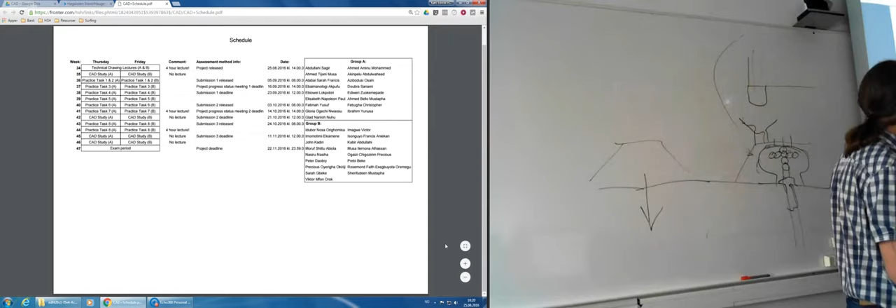So the submissions will be purely Inventor submissions, and you will do them individually. You will get an assignment, get a part that you are going to model, create a 3D model of, and then make a 2-dimensional drawing of it, and that's what you're going to submit.

The whole point is that if you make a lot of mistakes in the first one, that's not a big problem - it's not going to pull your grade straight down. But what's going to pull your grade down is if you make the same mistakes in the second one and the same mistakes in the third one.

If you keep making the same mistakes - because between these I am going to comment on them, so you'll get feedback on what mistakes you've made - and if you don't check your comments and avoid making the same mistakes, that's going to have a negative impact on your grade. But as long as I can see you've progressed, learned a lot of stuff, and made some new mistakes later on, that's not a problem.

Everyone makes mistakes, especially in something like this where we have such little time to learn it. Professional CAD drawers go to school for 2 years, and then have 2 years as an apprentice if that's their vocation, while we engineers are supposed to learn it in a couple of weeks during fall. So it's quite a difference.

So no one is expecting you to create perfect drawings. If you manage to create perfect drawings, hey, that's perfect, nothing better. But there will be mistakes, and that's not a problem. So if there are a lot of comments on your first submission, don't be afraid - it's not going to be a huge problem. Just learn from them and correct them for the next submissions.

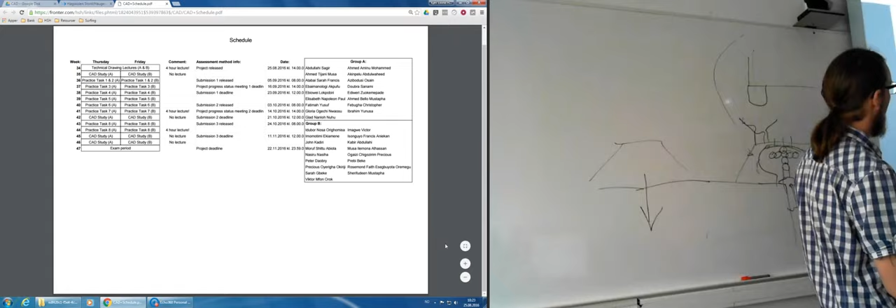Since you already have CAD study next week, I can hold off lecturing you on practice tasks 1 and 2 for two weeks, but you're very welcome to start already. As you'll see as we progress through the compendium today and tomorrow, I've made a fairly step-by-step guide for all the practice tasks, so it should be quite possible for you to start working on your own.

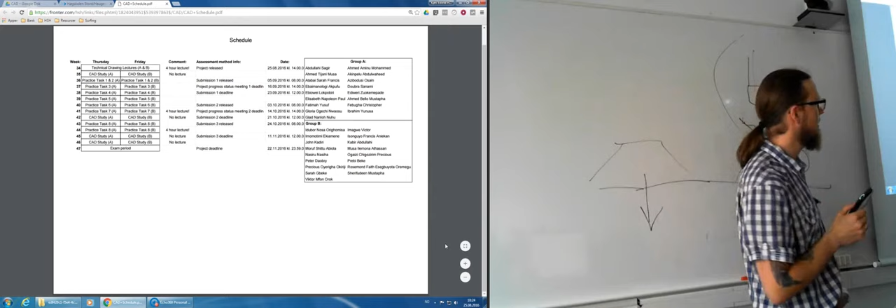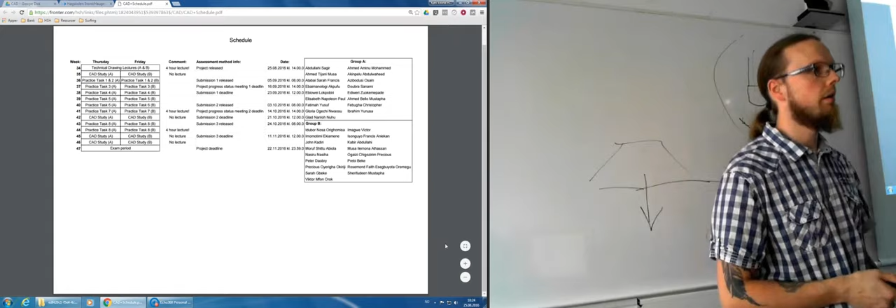You're supposed to have 4 student assistants, but Gabriella is going away for a week or two - I think it's next Wednesday - so you'll only have 3 student assistants. Still, you'll have 3 available to help if you're completely stuck on something.

As I said, this is up on Fronter. You go to the CAD folder and you'll find the CAD schedule. I think Einald has put a scheduler in there too with CAD times, but just disregard that one. He's basically just put in the times for when CAD starts. Follow the CAD schedule in the CAD folder instead, because that tells you what you're going to do and what we're going to work on.

We also have the compendium, which we're delivering out now, also available as a PDF. There are a lot of links inside it to YouTube videos, so you can either search for the name of the video or open the PDF and just click the link. All of the YouTube videos are on my own personal channel, so they're easy to find anyway.

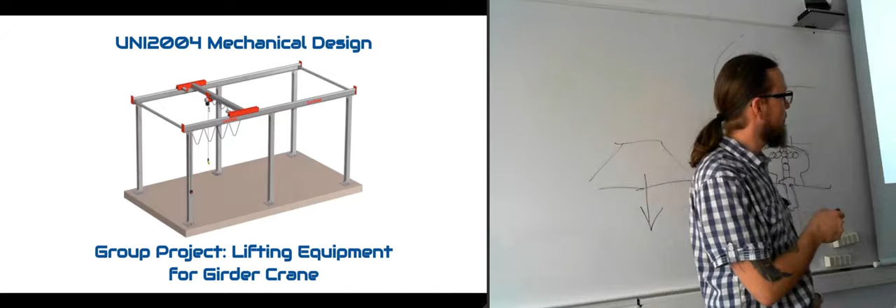So it's a group project or a team project, whatever you want to call it. You're going to design a lifting equipment, which is to be used with a girder crane. This is an illustration of a girder crane. It has a trolley up here, which can move this way, and it also can move this entire girder that way, so it has X and Y coordinates, so it can move in two directions. It has a hook at the tip, and you can lower the wire down and lift stuff with it. So if you've ever been inside industrial warehouses and stuff, they use this all the time.

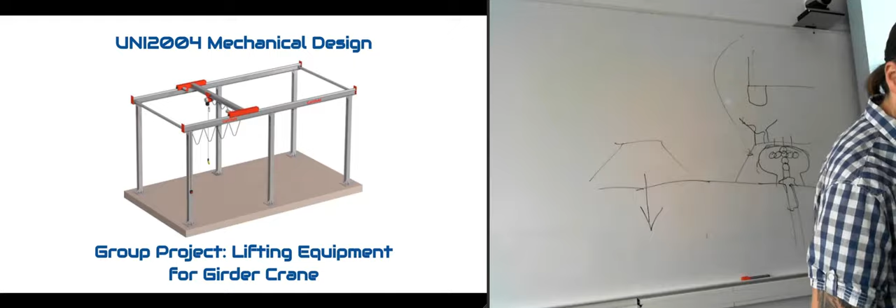So the project description: we have a customer who is in need of bespoke lifting equipment. Bespoke means that it's custom made for their need, a synonym would be tailor-made. So it's something that you are designing for the customer for their exact purpose, and they are going to use it with their girder crane.

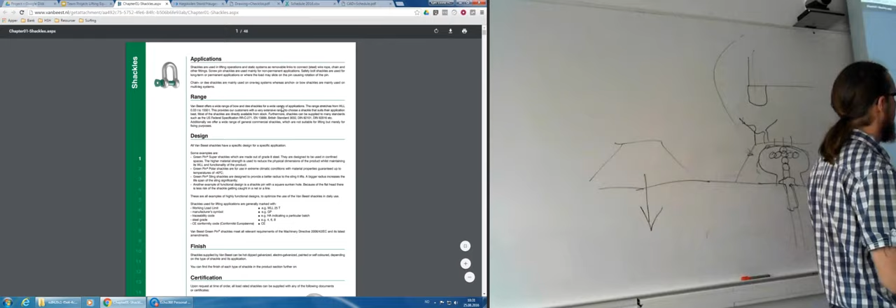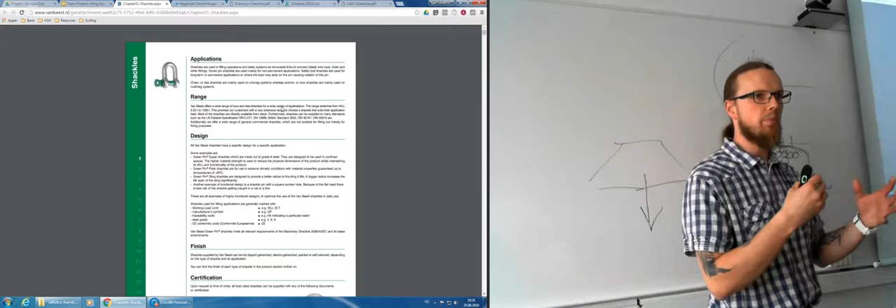They are going to attach the lifting equipment to the girder crane hook by using a green pin standard shackle. So you can see there's a link there, which puts you into a PDF document, and this is the kind of shackle that's going to be used. So basically the hook is going to hook into the top part of the shackle, while this green pin is going to go into your lifting equipment. So you have to have some interface in your lifting equipment that allows you to fasten this shackle onto it.

So then you have to just go into the tables in that PDF for the green pin shackles, and you will find workload limit 1 ton, and there you will have all of the dimensions given, so that you will know how your design has to look with regards to the shackle.

This means that the lifting equipment will also have a workload limit of 1 metric ton. We could have told it to be something more, but then we would have made the shackle the weak point in the system. So you would still only be allowed to lift 1 ton with the shackle in place there.

But usually, when you're designing stuff that's going to use shackles, you always try to design it to the specific shackle. So if the shackle has a workload limit of 1 ton, as in here, you will also design for a workload limit of 1 ton in your design.

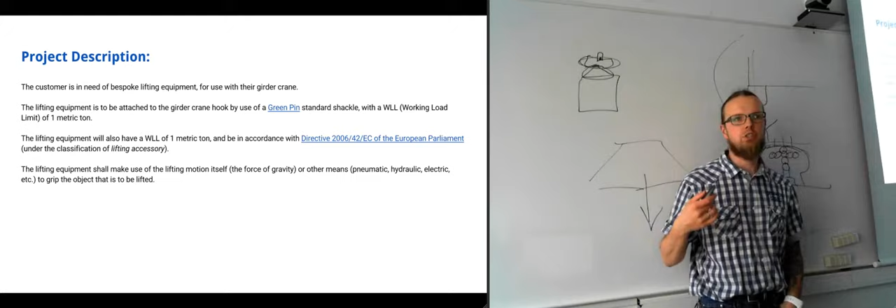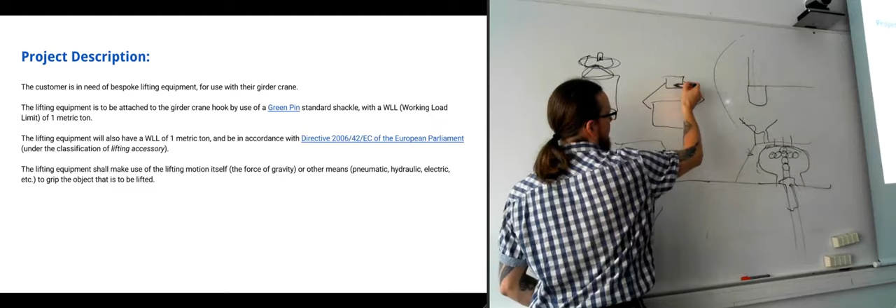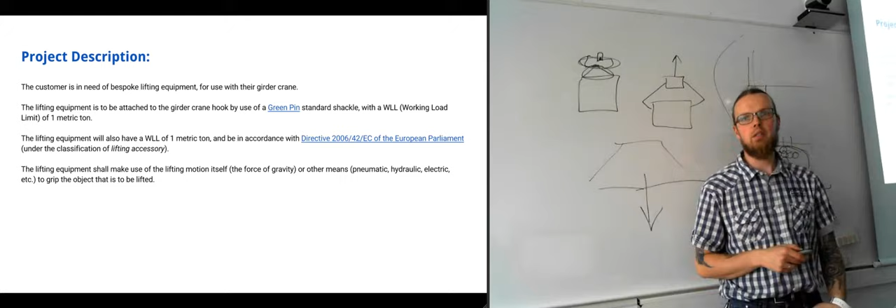But if you can, I would advise you to try to challenge yourself to find ways of using gravity to do this, to make the mechanism. If we have this one again, if there is some way you can have some claws or something that will grip it on both sides, and then through some mechanism in here, it will be as soon as you start lifting it, these claws will press in and hold it tight. So that's other ways of doing it. Those can be quite fun to look at, because you get to look at levers and everything and how you're going to design it. It can be a bit more challenging using the force of gravity, but it is also more satisfying when you see how you can do it.

So we have several teams, and each team will be assigned a different object, as I said. This also means that each team has to find their own solution, because none of the objects are alike, so it won't be possible to sort of borrow ideas directly from others. Well, maybe you can borrow and adapt ideas from other teams, but you can't borrow them directly. That's pretty impossible.

I've already assigned the teams, 3 or 4 members for each team. The reason I've already assigned them is to simulate a work situation, because unless you have quite a lot of experience and are in a position where you are a project leader, you are not able to choose who your team members are. If you're a project leader, you can usually say, well, I need that guy and him on my team, then we can do this job. But usually, as a freshly educated engineer, you are the lowest ranking member of the team, so you can't get to choose anything. That's why I've just put everyone into groups, so that you sort of just have to find a way of working together if you're not used to working together.

And the team members, you get them here. As I said before, I'm not going to try to pronounce much here.

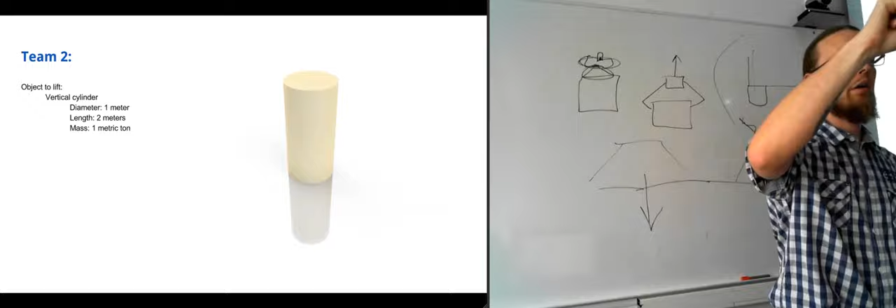You have team 2, they are going to do a vertical cylinder, which means that the cylinder is going to be placed vertically on the ground, so you're going to have to be able to lift this in some way or other. Let's see here, team 2. And here we have the team members of team 2.

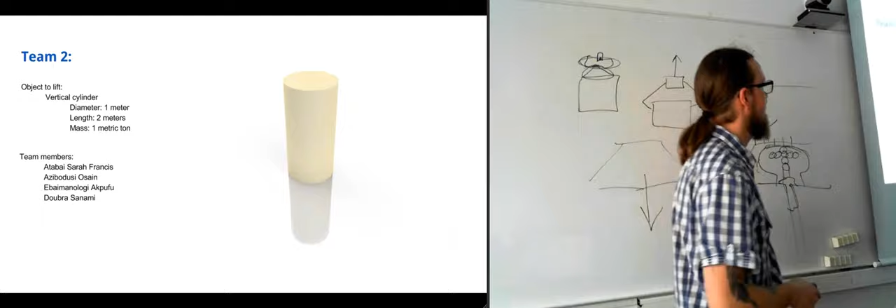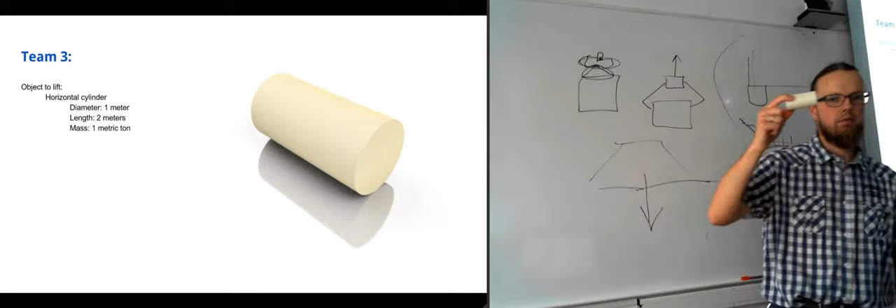Team 3 will have also a cylinder, but now it will be horizontal instead. So that's a different way of lifting it. This one. And this is team 3.

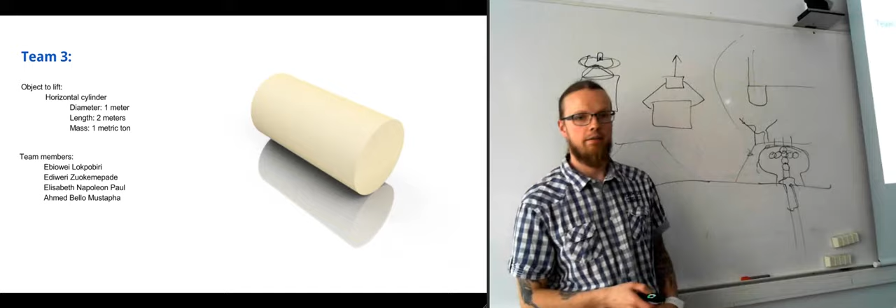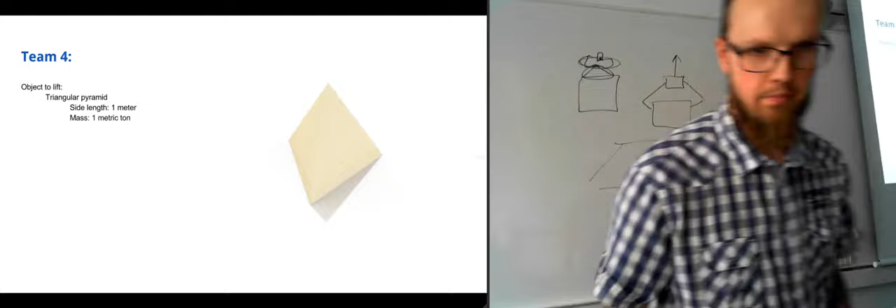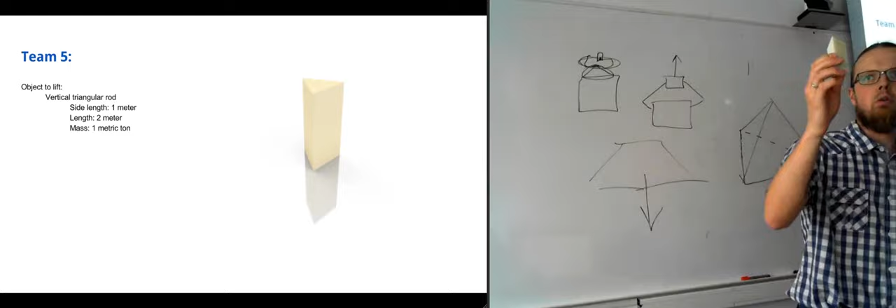Team 5 will have a triangular rod, so it has 3 sides, but it's going to be vertical instead. The team members.

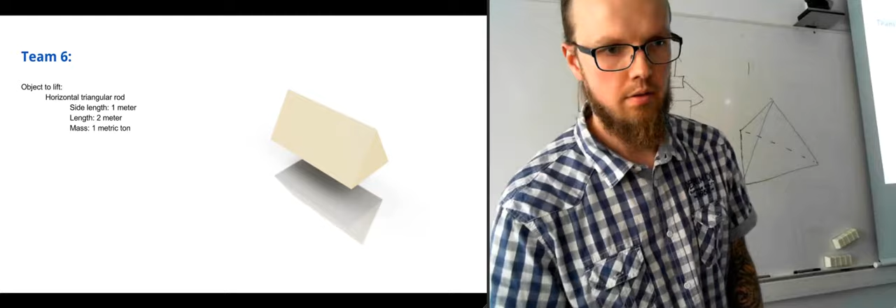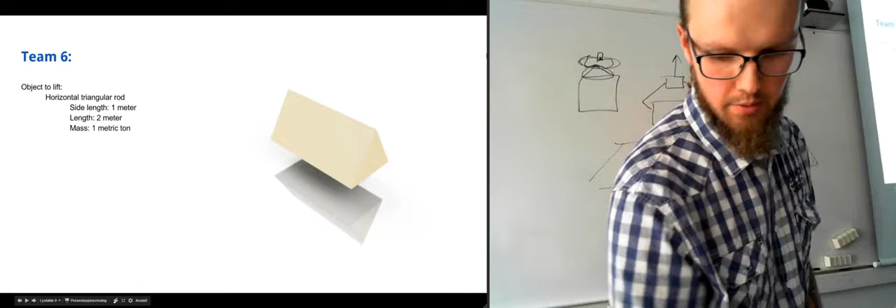We have a horizontal triangular rod for Team 6, so it's basically the same as Team 5, on the horizontal instead of vertical. And the team members are here.

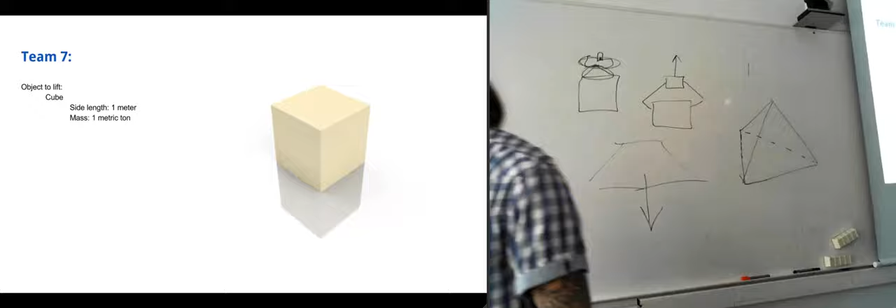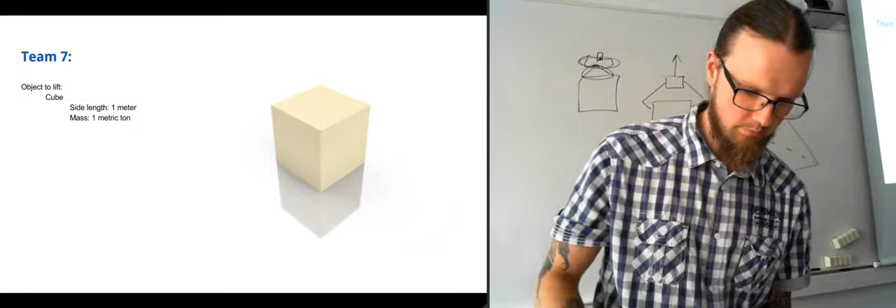Team 7, they have a cube. So a cube will be fairly similar to what I drew on the whiteboard. And the team members.

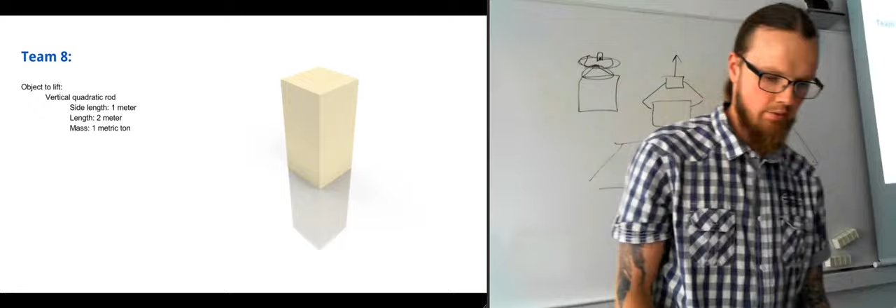Team 8 will have a vertical quadratic rod. So it's this one, vertical. And the team members are...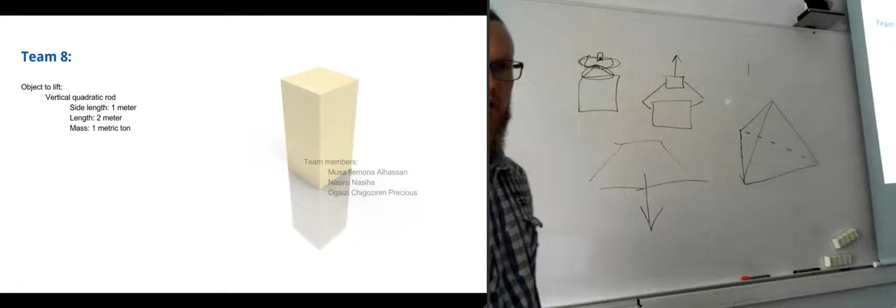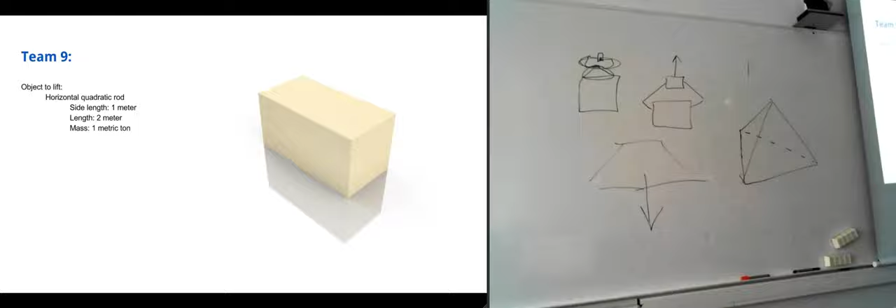Team 9 will have a horizontal quadratic rod. And the team members are...

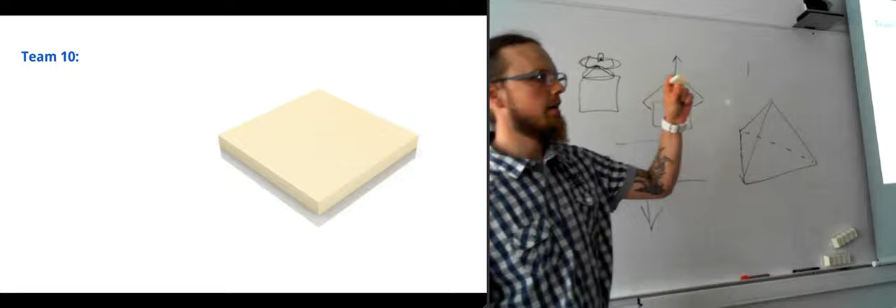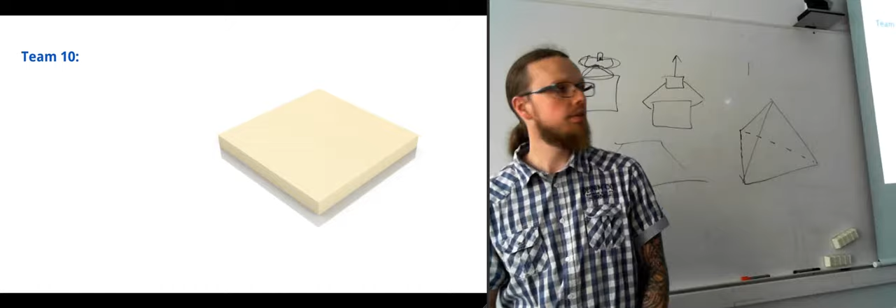Team 10 will have a flat plate, so it'll be lying horizontally, the entire plate. The problem there will basically be to get a grip on the sides or something if you're going to try to lift it somehow. And the team members.

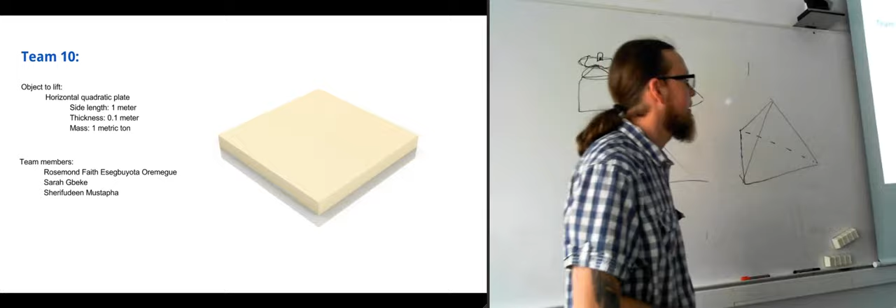Mostly this has been done alphabetically. I've just picked people into teams, so there's not much forethought that I put into who I've put into which team. It's basically done from the attendance list for Group A and Group B, and I just pick people. So it's fairly random, everything.

During the semester, we will have some progress status meetings. Those status meetings will be done with the team representatives, so all of the team members, and representatives of the customers, which will be either me or Torbjørn. So for the first, I think I'll get that later on. We have two mandatory meetings, so there are 2 meetings which you have to have with us.

And then we can schedule extra emergency meetings if needed, so that if you've had the 2 meetings and ended up with a design that you're going to continue going with, you've chosen your solution, and then you suddenly figure out that this isn't going to work at all, we need to do something completely different instead. Then you are allowed to schedule an emergency meeting with one of us, so that you can get a little bit of feedback on what other solution you should choose.

Me and Torbjørn have some experience in this, so we should be able to direct you into a workable solution first off. So I think it will be enough with the two meetings to get you into the correct solution, but as I said, emergency meetings can be done.

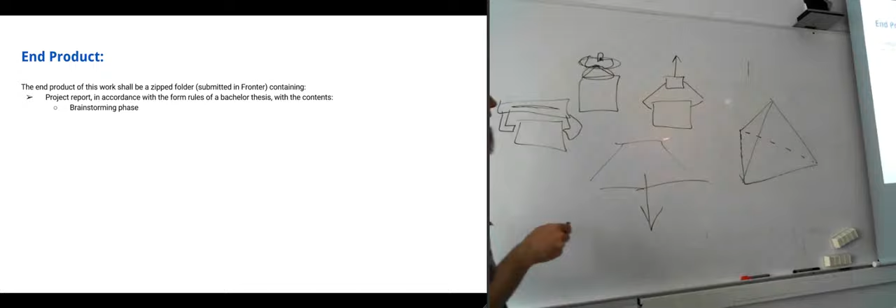In the project report, you're going to put in your brainstorming phase. Just a little bit of text explaining the different designs you had in your brainstorming phase. It doesn't have to be much, a couple of lines describing your thoughts around a specific design, and maybe a pro and a con for it. Does it look like it's going to be very successful, but very expensive? Just a little bit of that.

The planning and design phase you have to put in there too. After the first meeting, when we've chosen a design, all the work you do from there on, you should try to document somehow, whether just making a couple of paragraphs every now and then on what has been done. Your design calculations have to be a part of it. That's directly connected to Torbjørn's part of the lectures, where he does the calculation part. Basically, you have to use what he teaches you and transfer it to your own design, to see exactly where you have to do calculations and where you can skip them, not a problem, especially for the hydraulics part.

You will also have a short cost analysis part. This is just to make it feel a bit more real when you're doing it. Of course manufacturing costs will be pretty impossible to get an actual cost on, but it would be nice if you try to just wing it, to guess how much it would cost to manufacture. So if you know you have a lot of welding, you know it's going to be quite a lot of hours of welding, and you're not quite sure what an hour of welding costs, but you can just try to put in some figures and get something there.

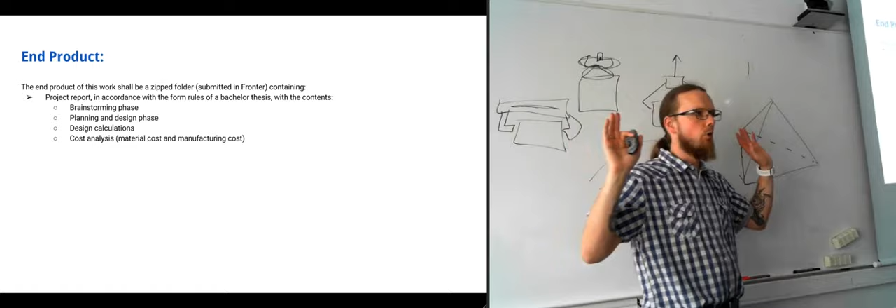So then we get into a bit more of the actual work of an engineer when you're designing. You have to look at this stuff, because if you just ignore prices of materials and costs completely, and you just design the thing and send it to the purchasers that are supposed to get all of these materials, they are going to say, whoa, I'm not using all of that money.

So then you have to go back to the drawing board and start over again. That's why it's more efficient to just keep an eye on it all the time.

You're also going to have an appendix in the project reports. The appendix will contain the technical drawing package, so all of the 2D drawings you'll create for your parts, the manufacturing drawings basically.

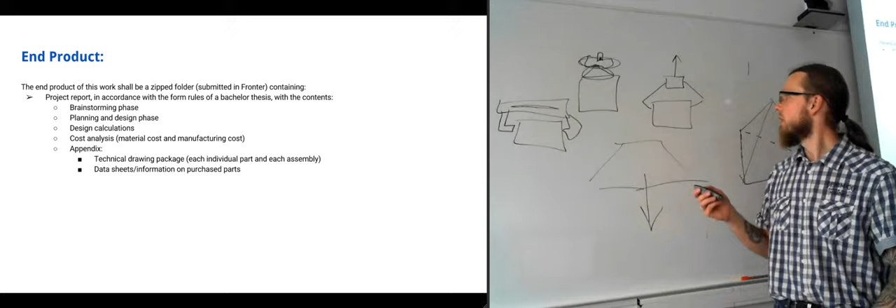It will also contain the data sheets or information on purchased parts. If you're going to use a suction cup or a hydraulic cylinder or something like that, you need to add that as an appendix, the information you get from that supplier's webpage. It shouldn't be necessary to actually call suppliers and ask them questions. If you can't find it on their webpage, try a different supplier. Basically, the suppliers who haven't stepped up their game and gotten everything on their web pages are losing out on a lot of customers. That's for sure.

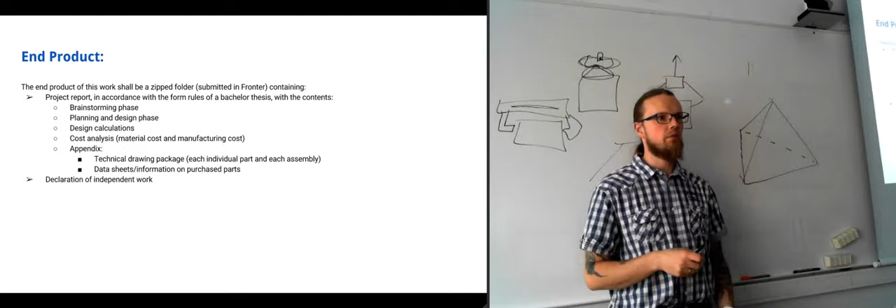In addition, we're going to have a declaration of independent work. So we'll have a declaration of independent work, which is all of the team members signing that this is your independent work. It is something we are required to add when grading a submission like this, because if it's found that you have directly copied someone else, you violated the regulations of the school and stuff.

You declare that you've done this yourself. So if we later figure out that you've copied it directly from someone else, then the grade won't be valid anymore.

It will also contain the 3D CAD models of everything for your design, and a 3D animation of each assembly. That's something you're going to learn all the way at the end of the year, so that's something you're going to use the last CAD study on creating basically.

In addition, everyone is to submit a one-page evaluation of the teamwork, and the evaluations will only be viewed by me and Torbjørn. They will be kept in a locked archive.

Apart from that, you are encouraged to speak your own mind about the teamwork. So if you feel that you've been pulling most of the weight for the team and that the others haven't done their part properly, you are allowed to write this in the one-page report. It is not because we are going to try to give poor grades to those who didn't pull their weight, but because we are going to try to evaluate how well you have functioned together as a team. Because it might actually be the guy pulling all the weight who's the problem, because he might not be telling the others to do stuff.

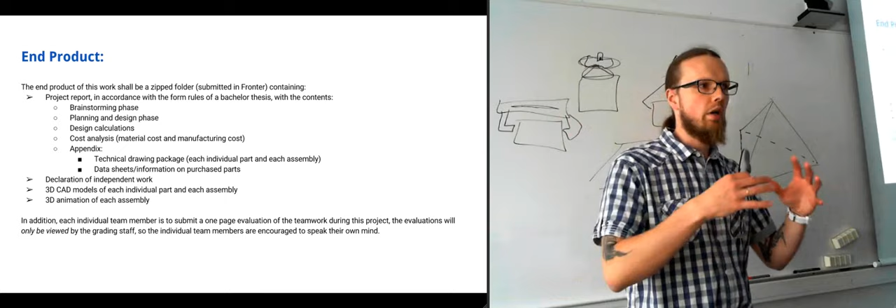You're also free to be a bit self-critical if you feel that you pulled a lot of stuff from the others and ended up being swamped with work yourself, and you're allowed to write this too. It won't be negative for your grade in any way. It's just a way for us to get a sort of view into how your everyday working with this team has been, because that's something we can't deduce from the project reports and the rest that you have delivered.

Do you want to criticize your team members, or can you still talk about them? If you are proud of your team members, you have to put that in there too. So it's not just about criticizing or anything. If you feel some of the team members have done very good work, put that in.

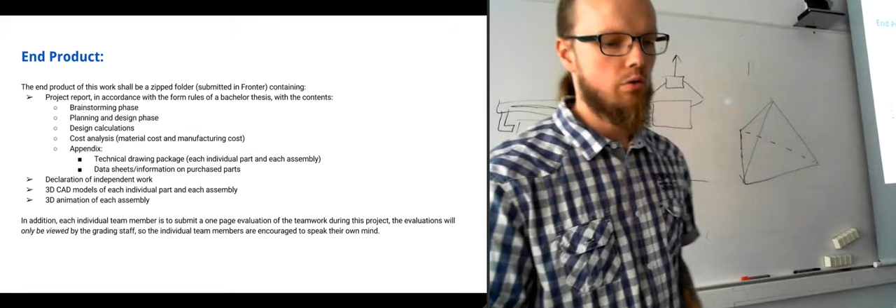It's just to sort of show us how we've been working. It's a part of the project in that manner, but it's not directly related to the grade. It's more like, did this actually work?

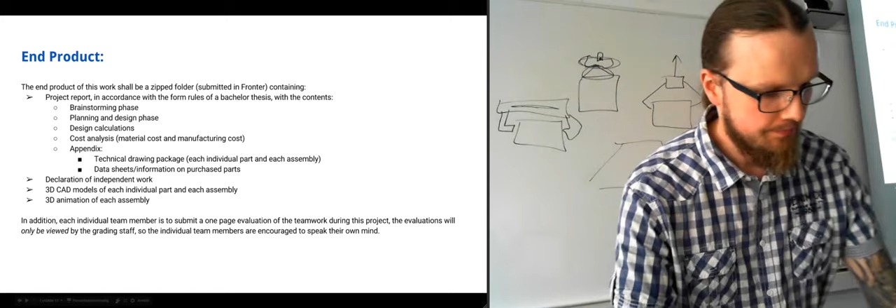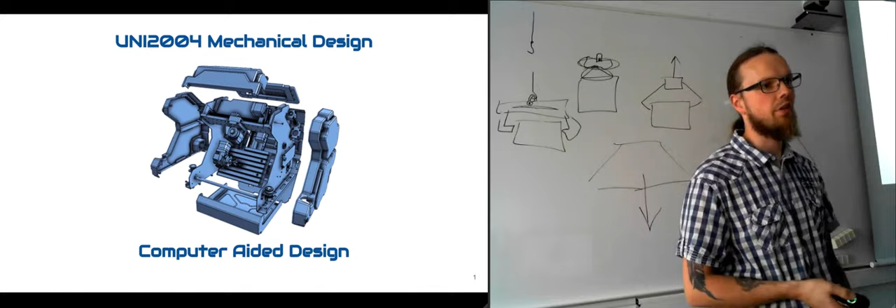Right, then we'll move on to the compendium in computer-aided design, CAD as it's short. You can see there's a pretty huge table of contents. That's because there's a lot of sub-chapters in this one, and each sub-chapter is like half a page mostly, and most of that is a screenshot and stuff, so the entire compendium seems a lot thicker than it actually is. There's not that much text in it compared to the thickness of the sheets of paper.

So we are going to be using Inventor from Autodesk. You were briefly introduced to it in your first semester. Since then, we have gotten a new edition of the software. I was told when I started making this compendium at the beginning of the summer, right after the exam period, that we were going to be using Inventor 2016. I asked specifically because I was installing it on my computer in the office, and I saw that there is a 2017 version out too. So wouldn't it be better to use 2017? No, they were going to install 2016 in the computer labs.

Well, what did they do now? A few weeks ago, they installed 2017. So I made this one from 2016, using Inventor 2016 on my office computer. But there's not a whole lot of difference between 2016 and 2017.

Usually the differences are when you get really deep into the complex functions, which we are not really going to touch on, because that's too much to handle in a brief course like this. And that's where you actually start seeing differences in stuff.

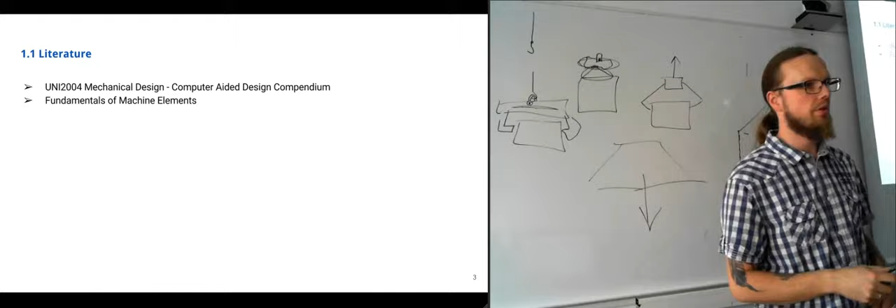We won't really be using that book in the CAD parts, but it is a part of the project, of course, because you have to do design calculations, and that's your textbook for design calculations.

You also have the Mechanical and Metal Trades Handbook, which is the other smaller book that you have. It has several sections, I actually forgot to bring it today, but it has cutouts for your thumbs to peruse it quickly. One of the cutouts is marked with TD, and that's technical drawing. That one is very good to use in this course.

That's mainly what the compendium is using also, I'm using that part of that book. You will also have in the other cutouts design and calculations and stuff that you can look at there. So it's really a good book to use.

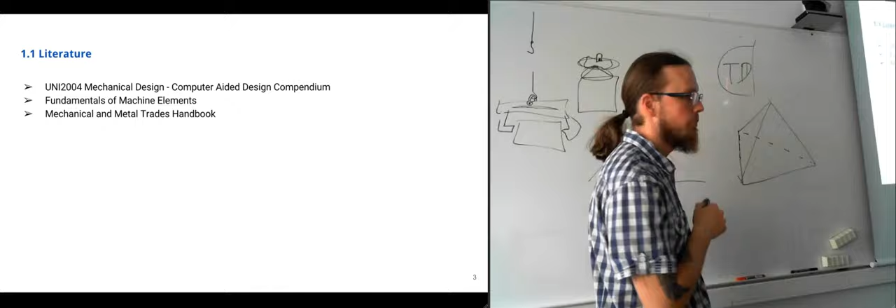Now, I'm not quite sure what Torbjørn has decided to do there, but I know there has been talk about letting you bring this book to the exam, but I'm not going to mix in that discussion. It depends on if they're going to create a formula sheet, or if they're just going to use that book as the formula sheet. That's Torbjørn's area, he's responsible for the written exam in this.

For the subsea parts, I'm going to discuss it a bit with Runal this week, or next week probably, I don't have time this week. But the possibility of maybe you actually bringing along some of your notes and stuff to the exam, that you're allowed to bring stuff you've written yourself during the semester, so we'll look into that.

I think it's important that you get to know it as quickly as possible during the next week, so that you can actually create the stuff.

I'm going to talk to Runal about it because I know he likes the idea. If I get the go ahead from him, because after all he's responsible for the entire course, then we are going to do that.

That will be clarified next week, just so you know. I'll try to do it already on Tuesday so you get that as quickly as possible, because if you're going to bring something you've written yourself to the exam, you need to know that as soon as possible so you can start creating it during the entire semester. That's how you'll learn the stuff you're creating.

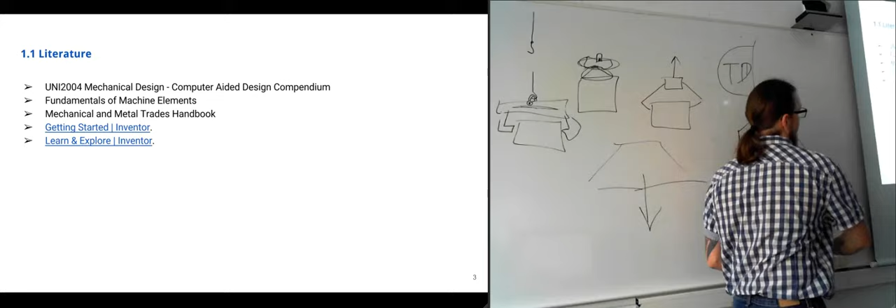You will also see, when using the program, small buttons all over the place with a question mark in them, which are help buttons you can press. That will pop up and show you stuff, sometimes linking you directly to these pages.

Also, if you just hover your mouse pointer above a function you're going to use and hold it still so it doesn't move, after a little while a tooltip appears showing you what this function actually does, sometimes with small animations showing what happens when you use it.

So there's a lot of stuff in Inventor. It's possible to learn completely on your own if you just have the time to sit down and play around with the software.

So we've used up the CAD laboratory, I've already talked a bit about this. Room 1093, we have it from next Thursday 10:15 to 14, and next Friday from 8:15 to 12. Then the room is ours.

No one else is allowed to come in and use the computers there, unless all of you have left during the CAD study or finished what you were supposed to do that week. If there's half an hour left, other people can come in, but if you then return, they have to leave, because you are prioritized during those hours.

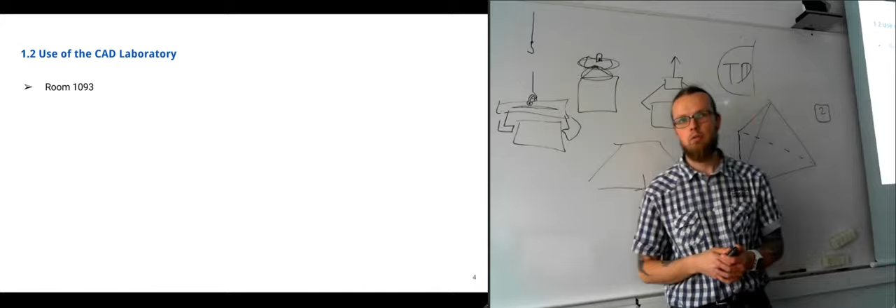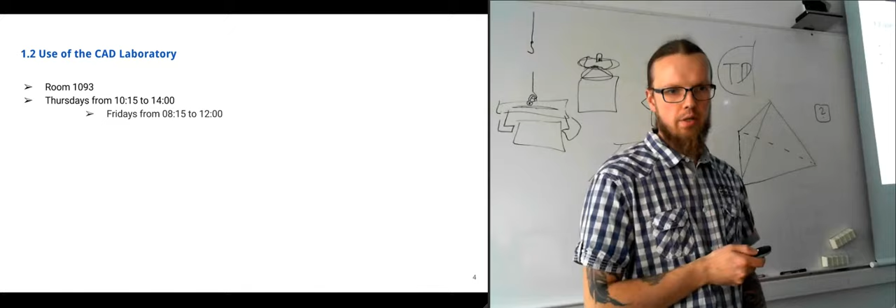Apart from that, the room isn't always occupied, so you can search it up on TimeEdit and see if there's a lecture in there. As long as there's no lecture and it's free on TimeEdit, you're allowed to go in and work. It's only reserved when there's a lecture scheduled. The same goes for Thursdays and Fridays with the 2 groups.

4 students. To begin with, we were supposed to have 2, that's what it says in your compendium. But of course it's 4, because I talked with Fredrik about it, and figured it's nice to have all the help we can get, especially when using computers, because if you fall a bit behind, either I have to stop the lecture to help, and everyone waits, or the person falling behind keeps falling further behind. So it's nice to have student assistants who can walk around during the lecture. I can do brief pauses if I see people asking the assistants questions, until they've gotten control again, helping you catch up. So it was very nice that we could get all four.

But for the first 2 weeks, Gabriella is away. I think she was actually going on a cruise. Lucky her.

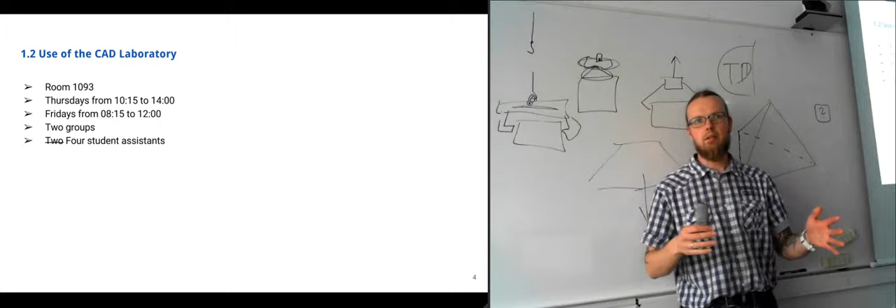The same goes for room 2084, on the other side of the wall here. If it's not occupied on TimeEdit, you are also allowed to go in there and work on Inventor if you need extra time, like for the group project and team project, to do some extra designs.

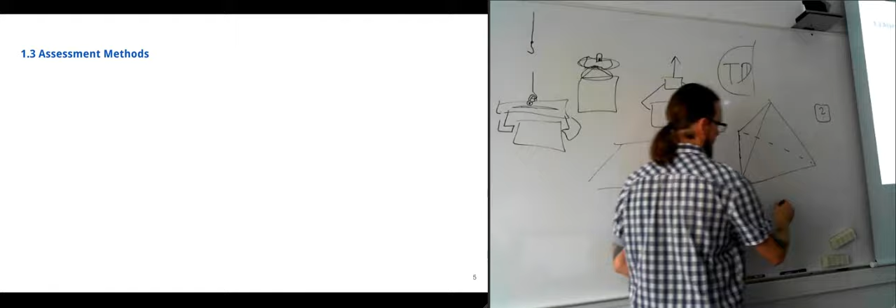That was one thing I wanted to mention also: the submission deadline for the project is, I think, 23:59 on the 22nd of November. That is the last day of lectures before the exam period, so you have until midnight before the exam period begins to submit the team project.

It's very, very seldom, at least for Norwegian students, that anyone fails - usually almost everyone passes. You have to have really failed during the semester, basically done nothing, to not pass at all. But if any of your teams should be unlucky and end up with a fail, you will have a new submission deadline 1 week after the last exam, so you get a full week to continue where you left off on the project report or the entire project.

You can continue working for a full week, then submit it anew. That will be the second attempt, and hopefully there won't be a third attempt for anyone. But if needed, we'll push it to New Year's or a week into 2017 or something - I'm not quite sure how we'd handle a third attempt. I feel pretty confident though, since you usually get a lot of guidance during the semester from me and Torbjørn, so you do get at least an E or a D.

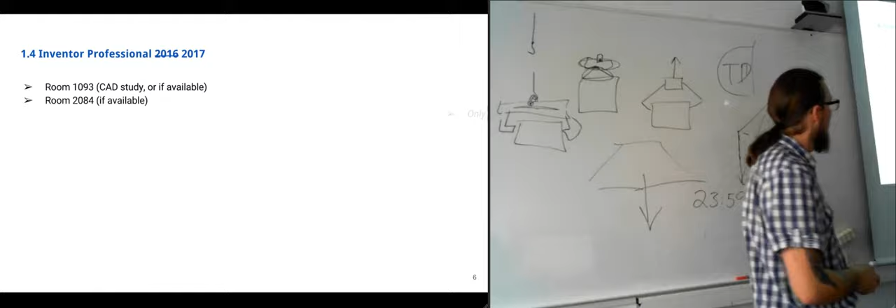One problem with Inventor is that it is only available for Windows. So if you have a Mac computer at home and wanted to work with this, it won't work because there is no Mac version. Are there alternatives? There are other software options that can do the same, but you'll end up with problems because you'd have to do it in another software on a Mac, export it into Inventor file format, and import it into Inventor. You could risk things not being quite the same, since functions in another program might not be interpreted by Inventor the same way, so that's always a bit of a problem switching between them. If you have a Mac at home, your only option is basically to use the Windows computers here at school. It's a bit sad.

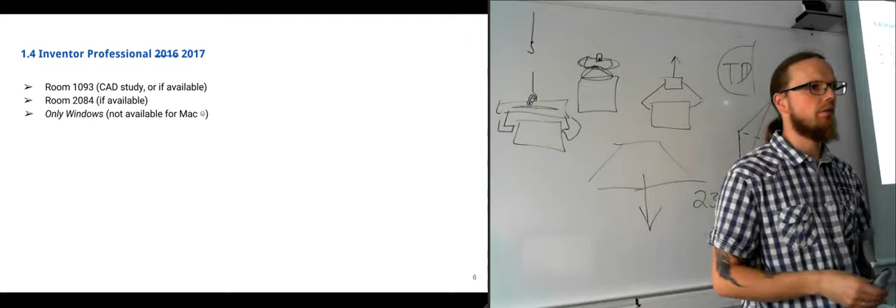I think it was up until Inventor 2010 that there was a Mac version. After that, they discontinued it, and then you're just screwed. I have a Mac myself at home, so I don't use Inventor at all.

So now we'll begin the technical drawing part. This is the actual theory that we'll be going through. Just a quick note before we start.

Right before the technical drawing part in your compendiums, you have subchapter 1.4, Inventor Professional 2016 at home. It's just a brief walkthrough. If you have a Windows computer at home and want to work with Inventor there, it shows how to register your student email, the one with @hsh.no at the end, with Autodesk, and then you can download a free student copy of the program. Actually, you get access to a whole lot of programs, since Autodesk is a really large software company with many programs, most of which are free for students. So as long as you've registered your student email, you'll have them free for the next 3 years. That's quite nice.

They also deliver a lot of 3D animation software to the movie industry. I know there are studios, not exactly Pixar but similar ones, that use Autodesk software for their movies. That's really cool.

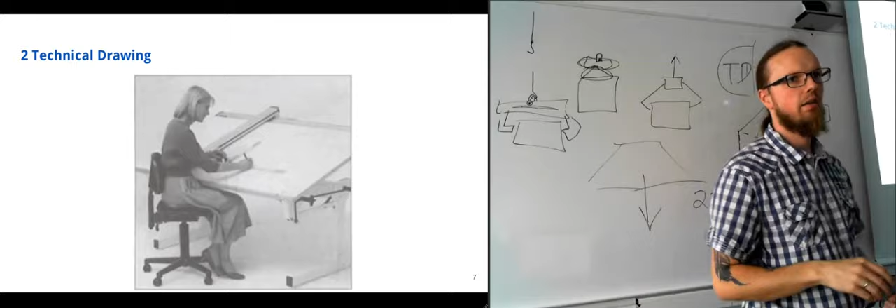I also feel myself that you are often more creative if you are allowed to walk around and gesticulate with your hands and do a lot of stuff. You have movement in your body when you're doing this kind of thought process instead of just sitting at a desk, because you get stationary when you sit there and your creative juices don't really flow.

There was a question about different software that can be used, and we have a lot of those.

We have AutoCAD, which is also software from Autodesk, but AutoCAD is mainly two-dimensional. So the Norwegian students first learn AutoCAD and then they learn Inventor. But we decided, when setting up this course for you, to go full in on Inventor, because you are all going to be construction engineers. The Norwegian students can choose between construction and process, and in the processing world of a mechanical engineer, AutoCAD is used a lot, so they need knowledge of both. But as construction mechanical engineers, you are much more likely to be working in Inventor or a similar three-dimensional software, so it's more useful for you to get extensive knowledge of it instead of just a brief fling with it, as the Norwegian students do.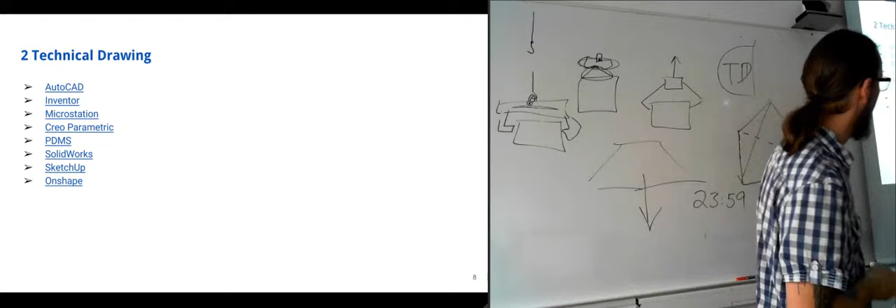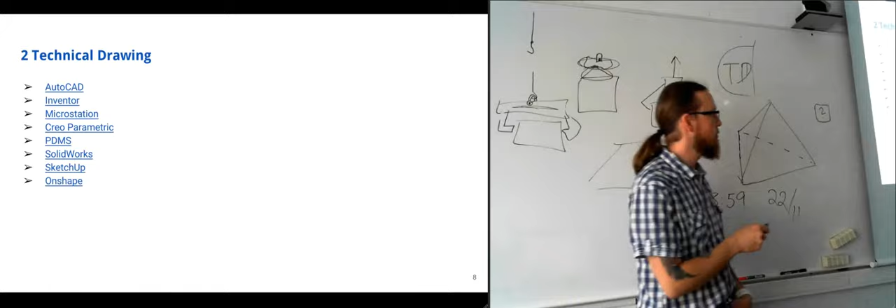Onshape is a very cool new software because it is fully cloud-based. So whether you are on a Linux computer, a Windows computer, a Mac, or even an Android or iOS device, you can use Onshape, because everything is located on servers in the cloud. If you're on a computer, you open up your browser and work through it to do everything you need, just as in Inventor. If you're on your mobile device, you just open the Onshape app and do exactly the same as through your browser. That's a really cool new one. I think they're just 1 or 1.5 years old, so they are really groundbreaking stuff. I think we're only talking about a year or two before the other companies figure out that they need to move into the cloud also, because this is a lot better.

Onshape is actually free, though you can pay for it. You can have a free account if you have a Gmail or Hotmail email, and then you'll only have a limitation as to storage - you get 100 megabytes of private storage that no one else can see, and about 5 gigabytes of storage so long as everyone else is allowed to see it. So if you're not doing anything secret, like just a school project, you can make it public and have up to 5 gigabytes there. Or you can register with your student email and get the full capabilities, because then you have an academic license.

So the inventor is used for just 3D drawings? Yeah, 3D models, and then creating 2-dimensional drawings from the 3D models. But you can also use it for more than that. You can do simulations and analysis on stuff. We won't really get into that in this course because we don't have the time for it. We will focus on the 3D modeling and the 2D drawings, which is what it is mostly used for. But come spring, you will get some other

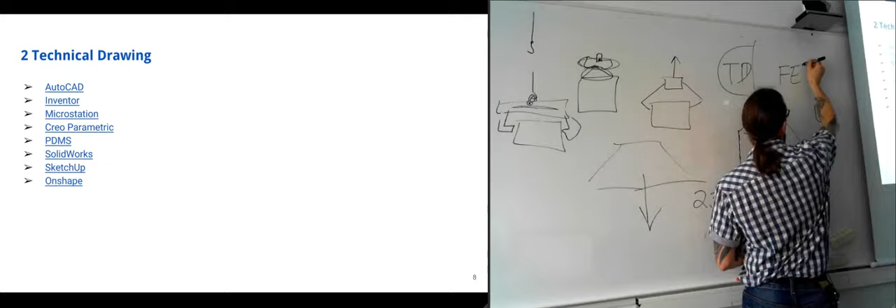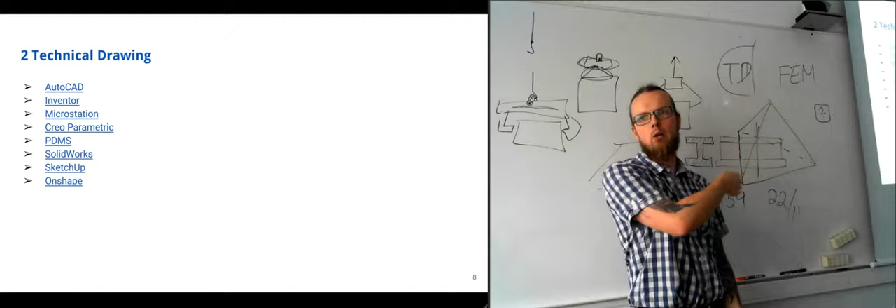softwares that use what is called FEM, finite element method. The finite element method basically means it does the same as you do when you're doing handwritten calculations of stuff. But when you are doing a hand calculation, if you have a beam, you are checking only one cross section of the beam. So you're saying, I'm going to look through here, and then checking that cross section. What the finite element method does is it divides the entire beam into millions of tiny cubes or pyramids or whatever shapes they use. It depends a bit on what kind of analysis you're going to run. So it just divides it into tiny, tiny elements, and then it runs the same calculations on all of the surfaces of each element. So it runs the exact same stuff mostly, but on a huge scale compared to hand analysis. And that is actually something you can do in Inventor as you progress, but you have to be more familiar with the program first. Well, as I said, with Onshape, you can get

the entire capabilities for complete storage, unlimited storage, if you just register with your student email. You can actually register several emails. So what I did before I started working here, I had already created one with my Gmail account in Onshape. But then as I started working here, I think it was April or May when they opened up this stuff for the academic account, I just logged on with my Gmail, went to my profile, and added my work email with hsh.no. When I added that one, I was automatically upgraded to the academic version where I have unlimited

storage capabilities. So now I can do whatever I want there, and I can choose myself if I want to keep it private or make it public so that everyone can see it. And the public part is becoming really popular because a lot of people are now investing in 3D printers to keep at home, cheap 3D printers and stuff. I think it's fantastic that they can actually see other people's 3D models, download them, print them, test out stuff, and just have fun with it.

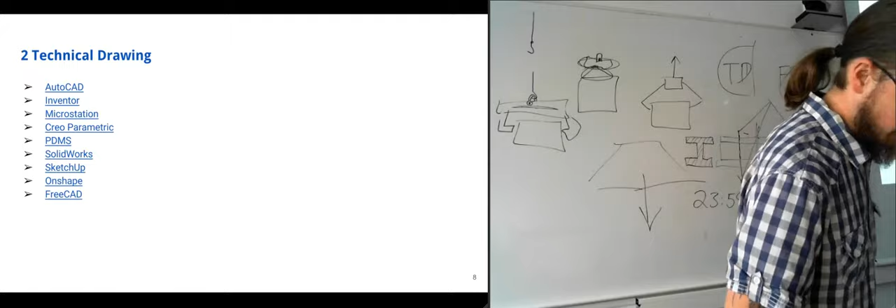You also have another free possibility, which is FreeCAD. That's open source. I'm not sure how familiar you are with open source stuff. That basically means there are a lot of programmers out in the world who also like to do 3D modeling and 2D drawings and stuff. They've started a project together where they are programming an entire Inventor-like program. So they are together creating this one, and it's completely free. Everyone can join in and program if they know how to program and stuff. So that one also has continual improvements because people are continually creating new stuff for it. So it's also pretty cool. Only for this one you have to keep an eye on it and update it yourself as it goes along.

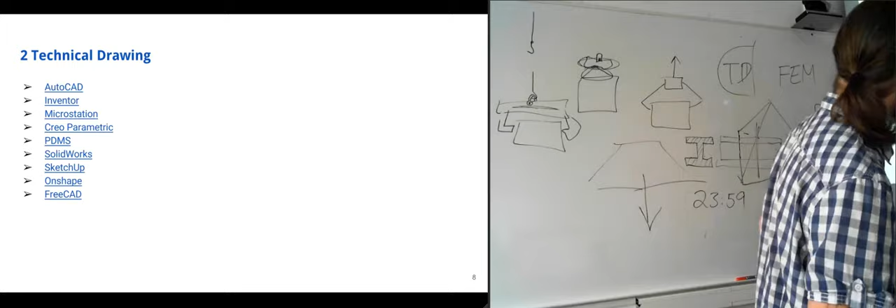From old we were doing technical drawings on paper, so sheet sizes are still a thing that we have to take into account.

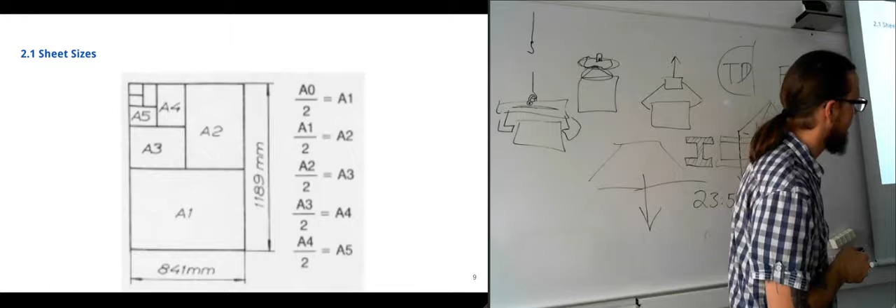Here is an overview of the sheet sizes. You know the A4, that's the regular sheet size. A5 is half an A4. A3 is twice the size of an A4. And then you got A2, and then A1. And there is also A0, which is basically the entire sheet there, so that's really big.

I've never drawn on an A0 myself, but I've seen A0s on drawing desks. It just covers the entire desk. It comes in a roll, so you have to roll it out. It's pretty huge, as you can see here, it's 1.2 meters and 0.84 meters. So it's pretty huge when you start with it.

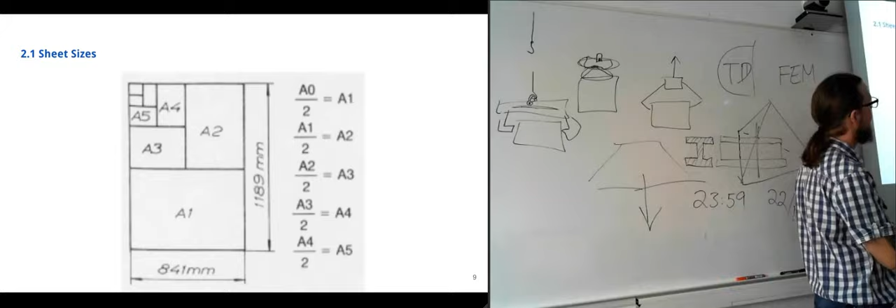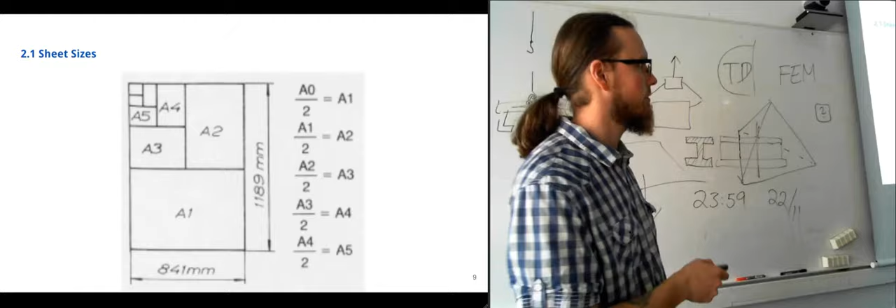Usually with technical drawings we stick to A4 or A3. It can be nice when we're doing stuff on the screen, it's never a problem because we can just zoom in or zoom out if we have problems seeing details. But when you're printing it, it's often nice to print in A3 because you get a bit bigger size, so it's easier to see all the fine details. Usually most printers can't do A2 or A1, so then you'd need special equipment. A3 is usually more than enough to get a good picture of the technical drawing.

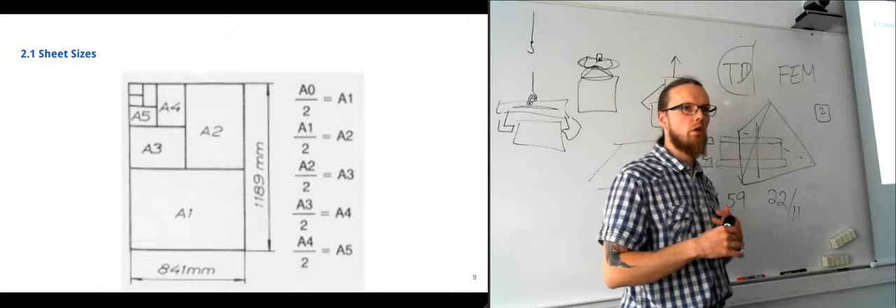So that's why we still refer to sheet sizes when we are drawing. Even though we are completely working inside Inventor and doing stuff there, we still have to choose what kind of sizes we are going to have on our sheets.

What happens is when you have chosen a sheet size, you won't really see the difference in the program. The program will still fill your screen with it, so it's not a really huge problem. But what it will do is create an outline, so you can see the gray border around there. That's the background outside the sheet, and then it will create this technical drawing board.

That's more for advanced technical drawings, because then you can go in and say, well, I'm wondering about something in sector A6, and then you go in here and say, well, there is A and there is 6. That means in this rectangle here, there is something we have to check out. So that's why they have this border, where you can sort of use it more or less like a map, so you can find different regions in the drawing.

Usually for mechanical engineers, you are not working on that huge, complex stuff, so it's not really that important for us. But when you do process engineering with huge plants, with maybe several hundred meters of piping going in all directions, very small scale, then it can be very useful to have some way of referring to specific locations.

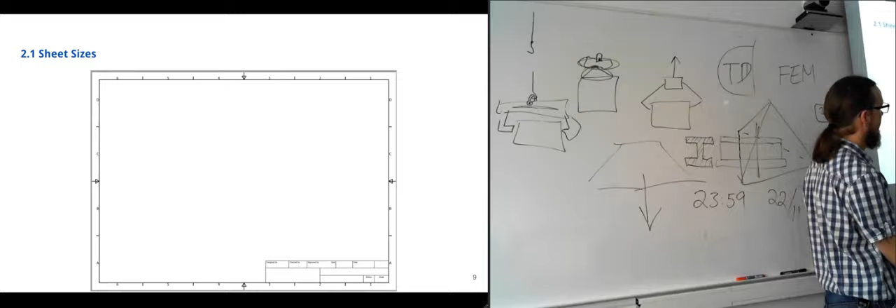You also have a title border down here, and that varies hugely from company to company. Like Emenco had their own design on the title border there. They even had some stuff up here, and that's more or less up to the company you're working for.

This one is an ISO standard, a standard from the International Organization for Standardization. So they have said that this is a nice way of putting it up.

So you have designed by, checked by, approved by. Those are the three engineers involved in the process. Usually in a company you will have one engineer designing, and then he will pass it on to another engineer, who will check it, go through checklists and everything, and see that everything is there.

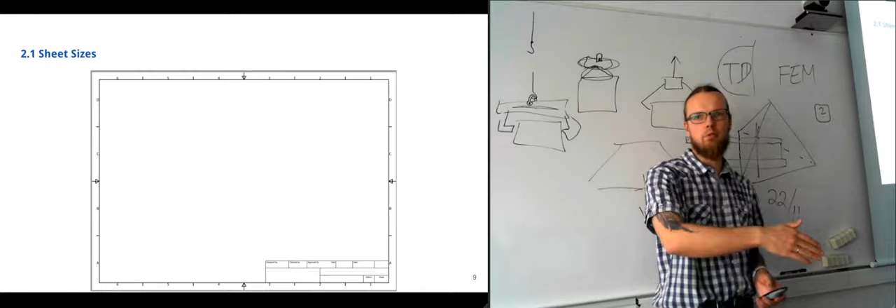And if he finds some flaws, he will send it back to the designer. Once those two engineers agree that the drawing is as good as it's going to be, they send it on to a third engineer who will approve it. Usually the third engineer is only supposed to check it and not have to send it back for fixing. So something has failed between the designer and the checker if the approver has to return the drawing for fixing.

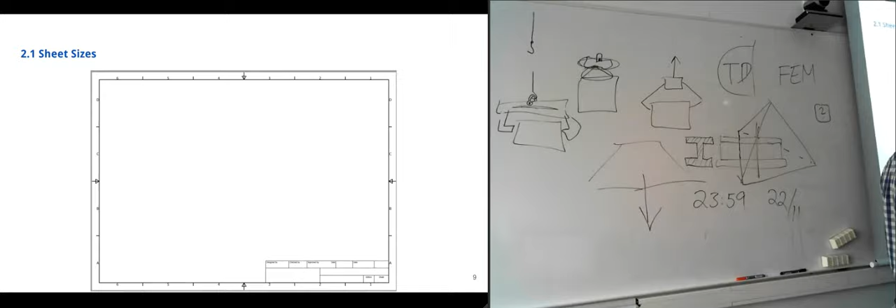So you have these points. Usually there is a company logo or something in there. You have the titles of the drawing, the drawing number and stuff, and you have revisions and sheet numbers in it.